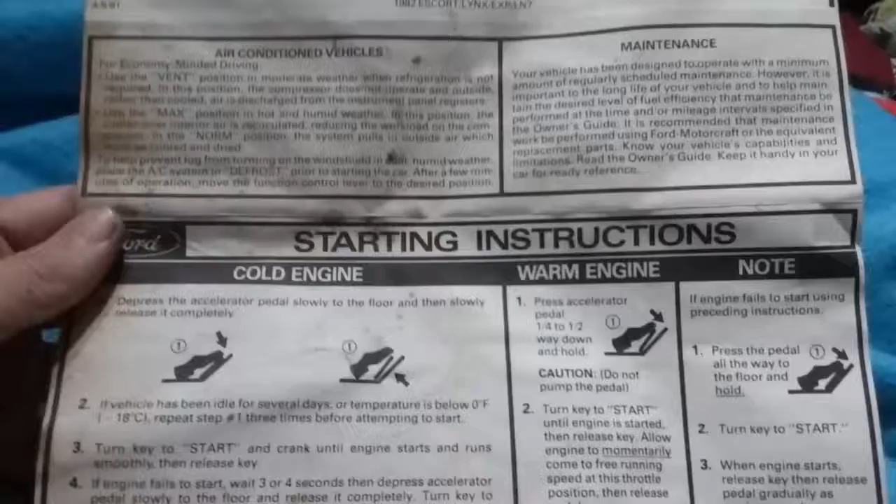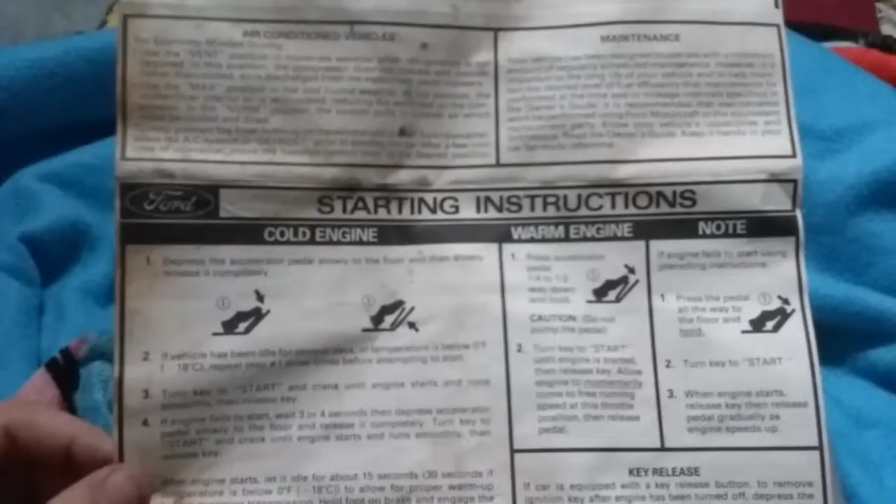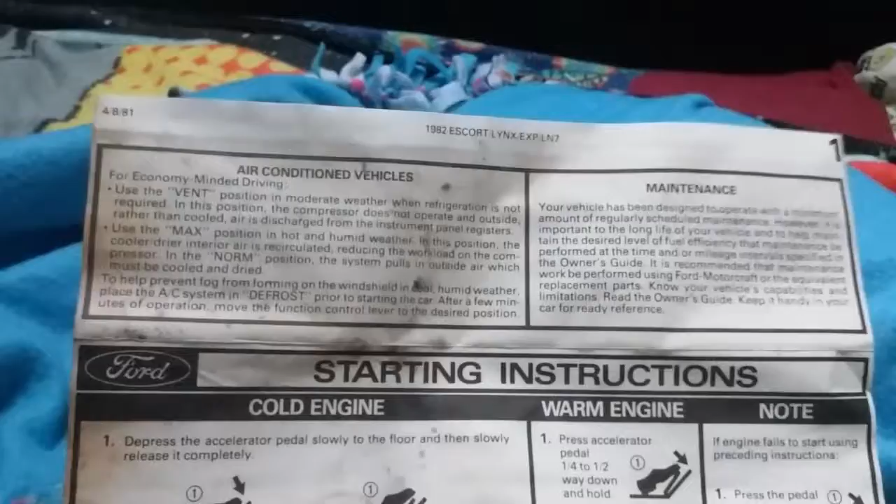Well, hello. This is a piece of paperwork you get with every EXP or LN7 and Escort or Lynx. Or at least you should get this with every one of those cars. But I don't know if it's the same thing they put in all their other cars, meaning Ford and Mercury.

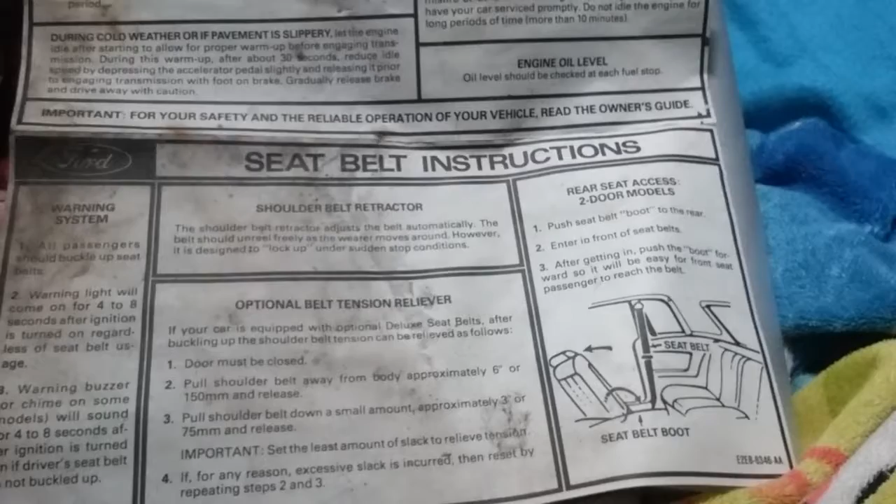Anyhow, it's an interesting giant piece of paper. I can't remember where they put these. They either put them in the glove compartment or wrap them around the seat belts or something. Kind of varies car to car.

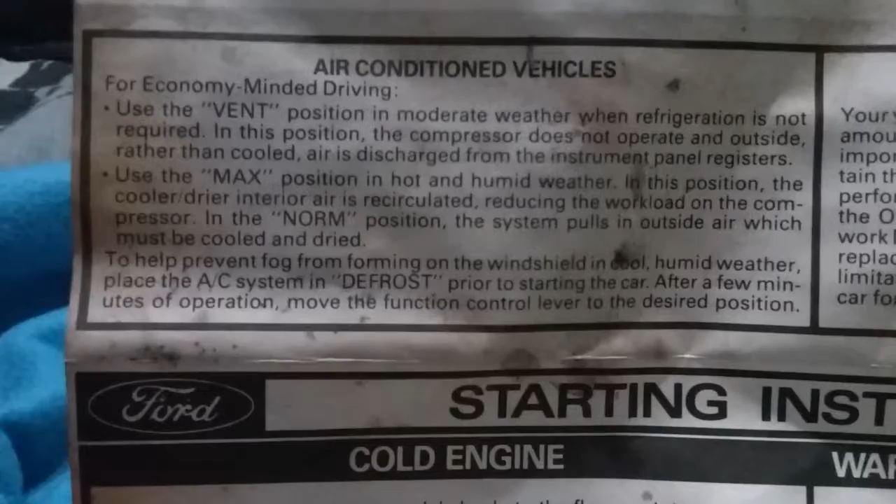Anyways, it gives you instructions for air conditioning controls. So I'll let you read that. Just hit pause and check it out.

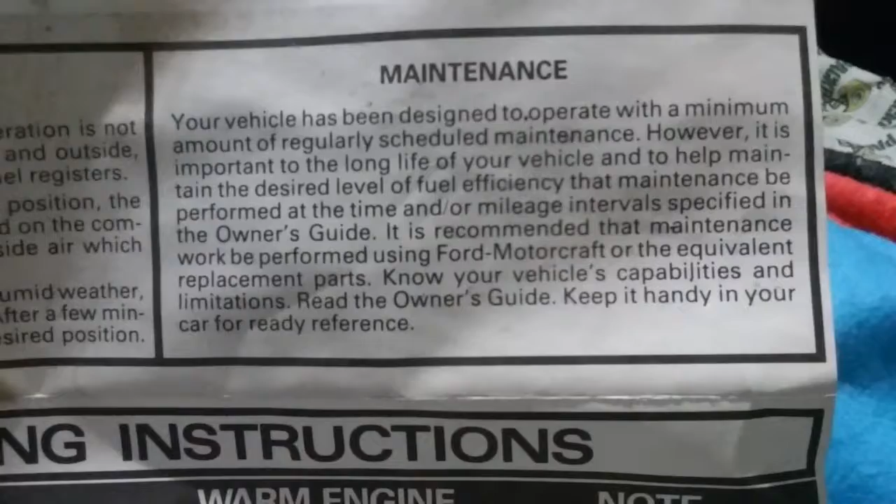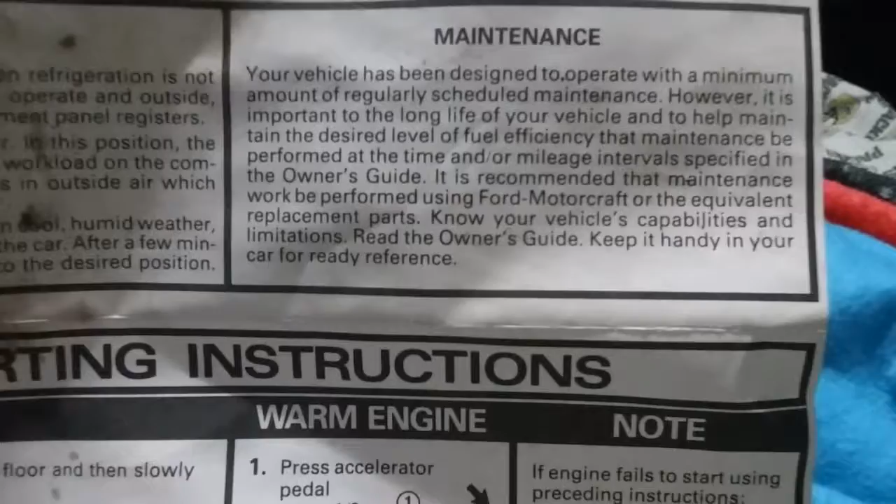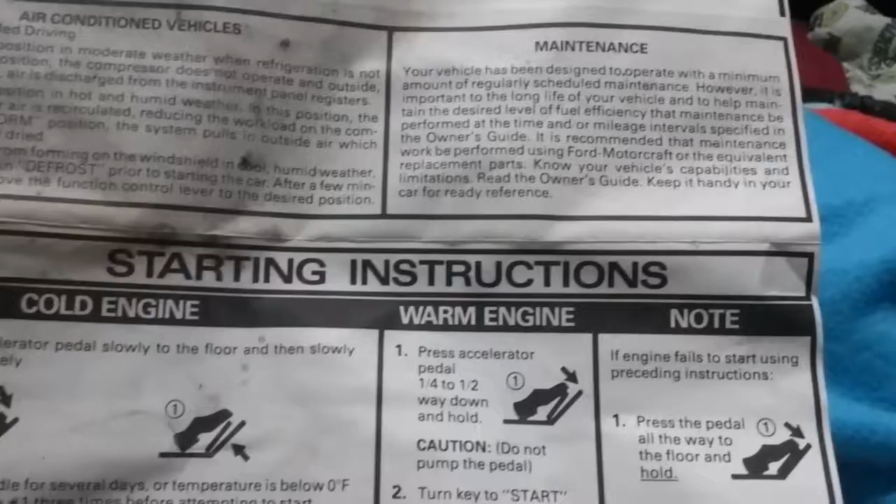It talks about maintenance. Your vehicle has been designed to operate with a minimum amount of maintenance. Even though the maintenance intervals on these cars are quite interesting. The timing belt has to be changed quite frequently, every 40,000 miles or less. But all the liquids supposedly can go on for a long time.

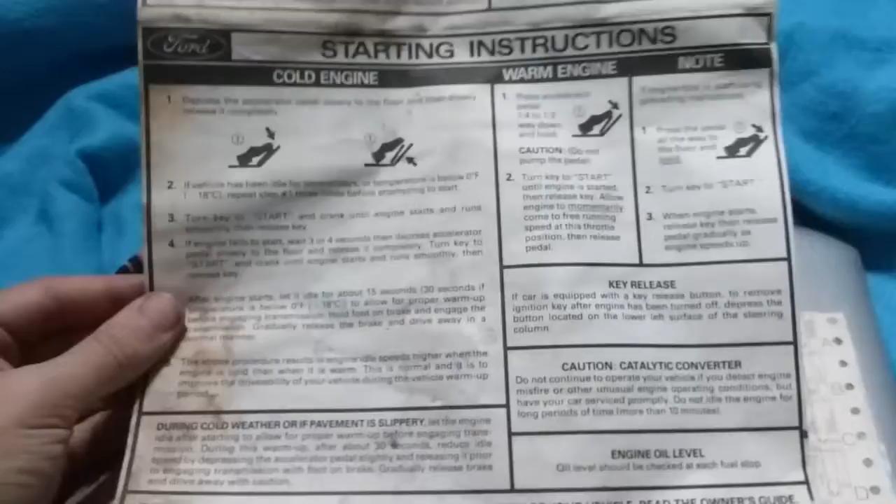But the next part of the paper, you can see it folds here. So this whole top half just folds away. So we'll do that here.

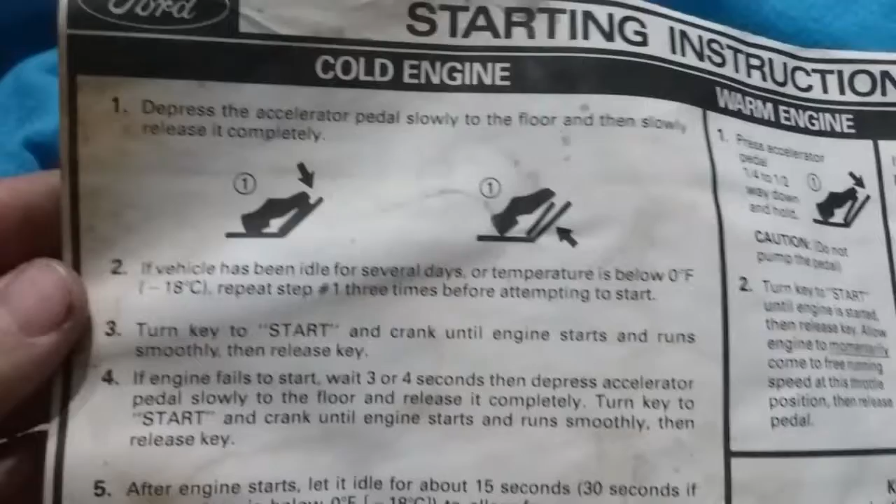Next section is starting instructions. So if your engine is cold, you follow these steps. Kind of common sense, but it is interesting if you don't know this or if you've never heard of it before.

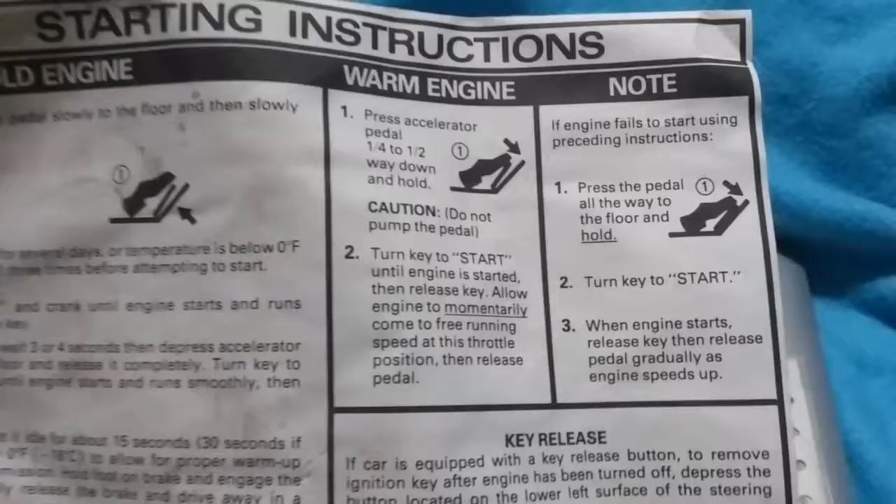Same if your engine is warm, or if you have a hard time getting it to start or whatever. And then it goes into some more detailed stuff.

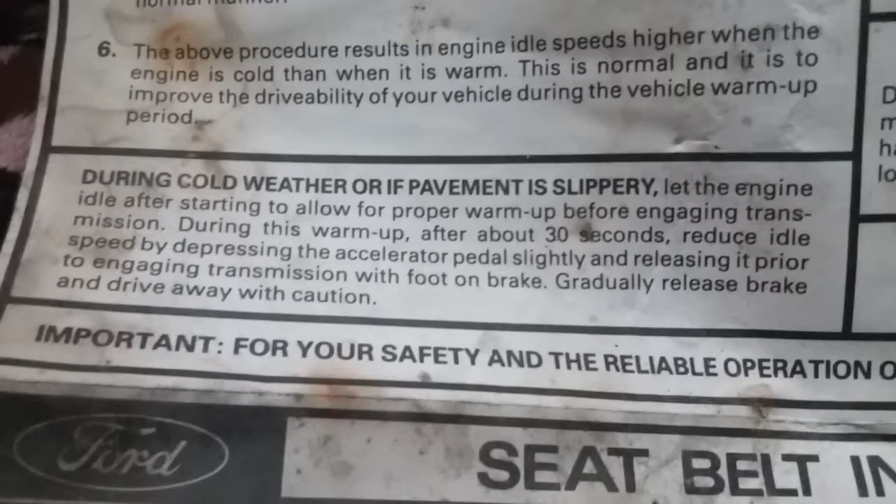That's interesting. It's got safety notes on it. Read the owner's guide - these are interesting. It gives you the directions for key release.

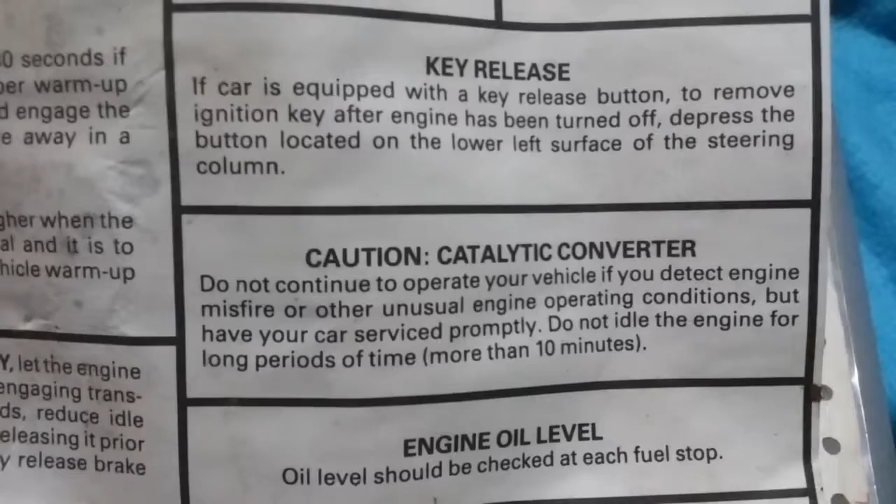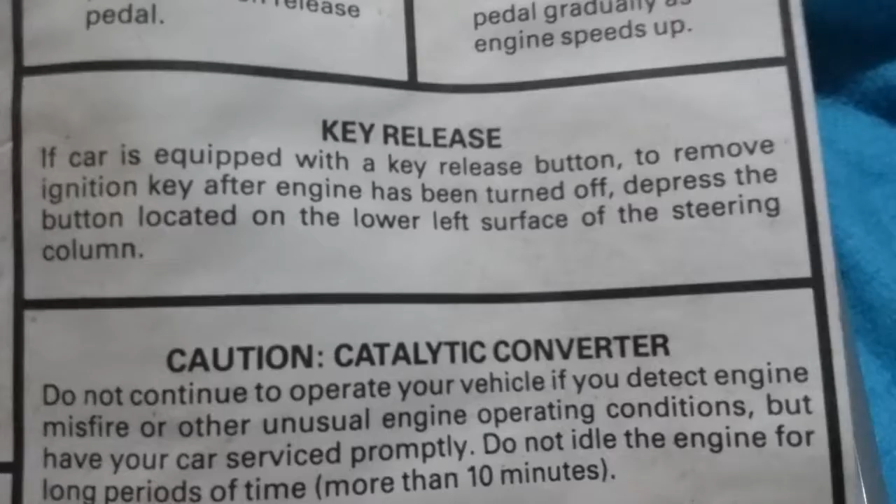Every EXP, Escort, LN7 and Lynx should have this. It's a little round plunger underneath the steering wheel. Like it says, it's just to the left of center underneath the steering wheel. So you just push that while you're turning the key, and pull that knob down and your key will come out.

Do not force your key out. You will wreck something.

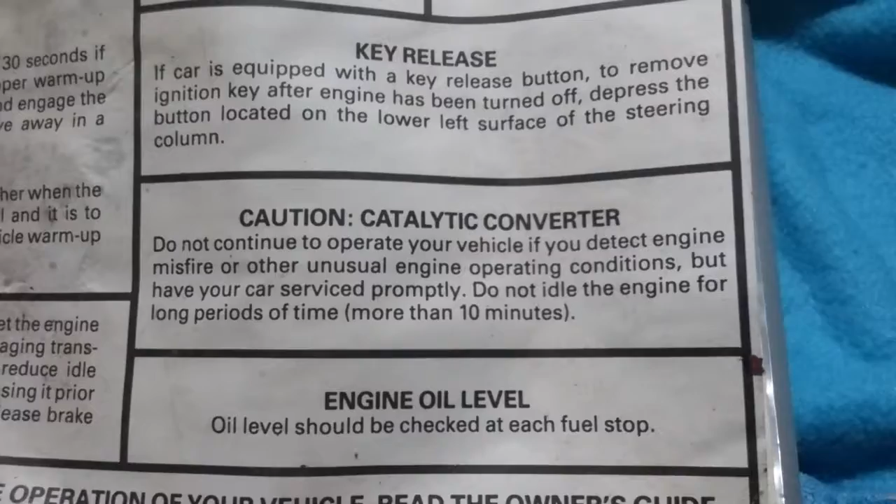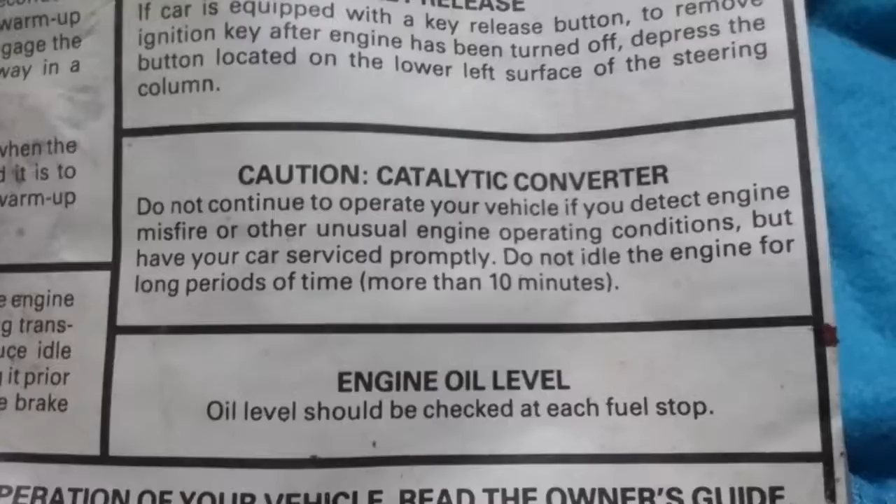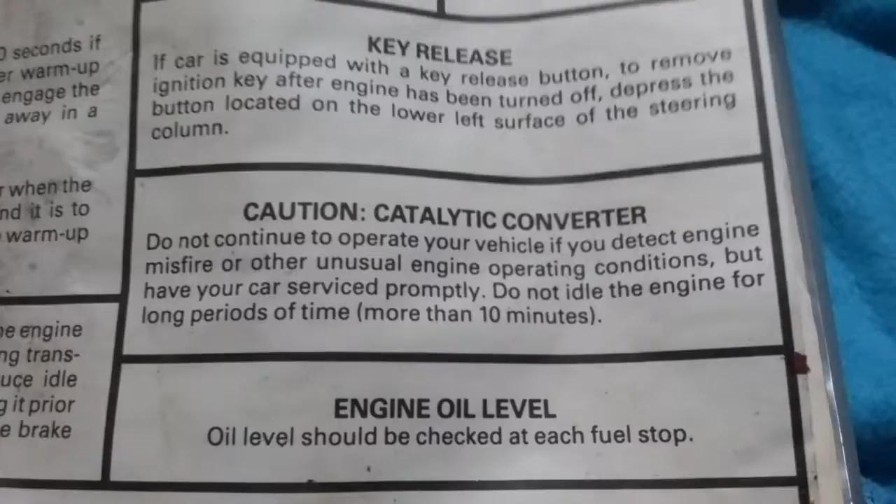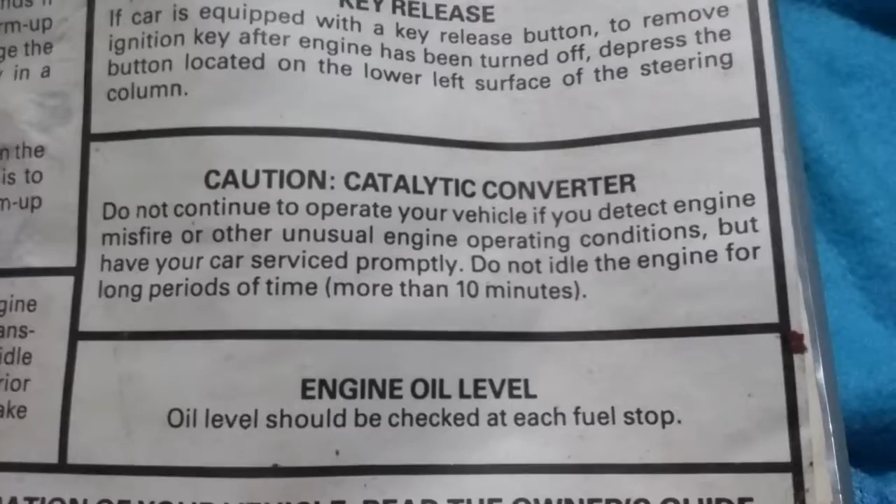Gives you catalytic converter caution. If you have an Escort, EXP, LN7 or Lynx, any car from the 80s pretty much, or pretty much any car built before 2000 probably has a plugged catalytic converter. Up until the early 2000s, catalytic converters would plug up well before the 150,000 mile mark. So if you have a carbureted car, odds are that sucker's plugged. I recommend emptying it, but that's not legal, so heed the warning.

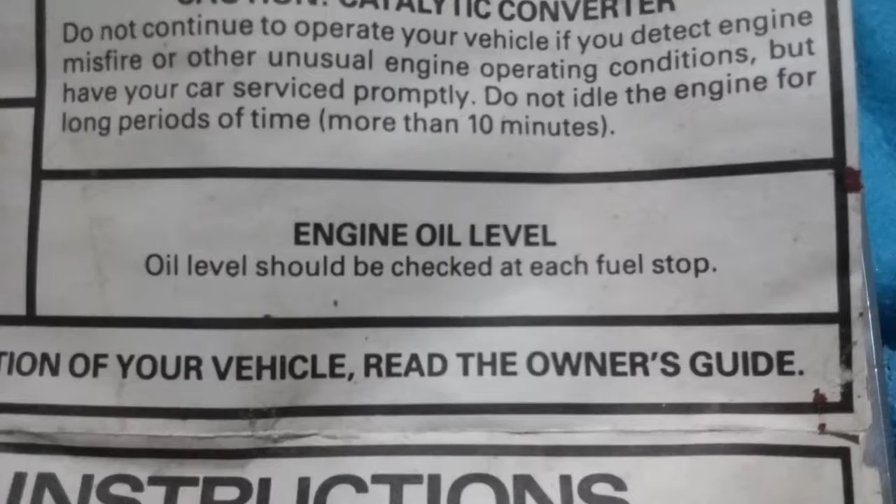Engine oil levels should be checked at each fuel stop. The CVHs don't ever seem to burn any oil. I only just got an EXP with a 1.6 that has some blow by, but that is the only oil issue I have ever come across out of all of the engines I have.

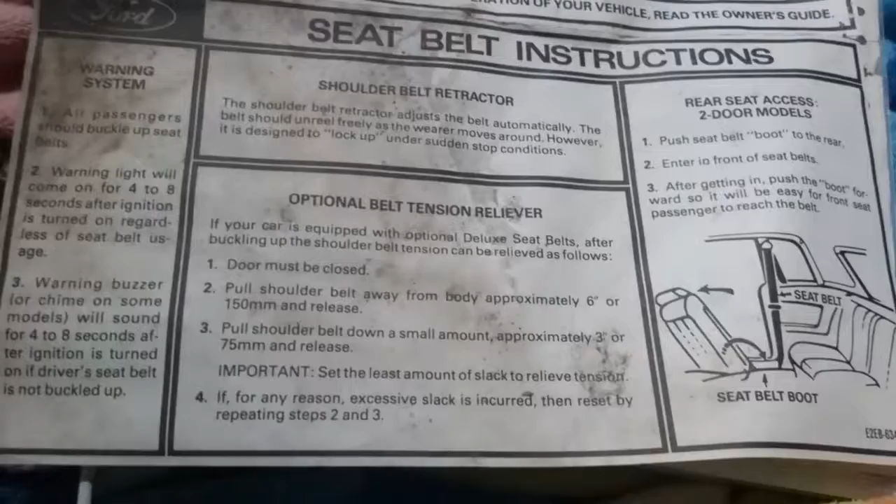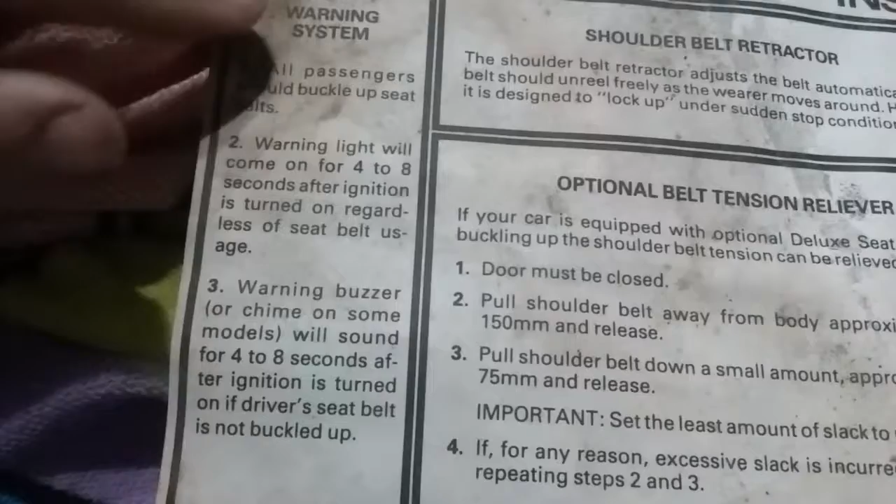And then the final section here is seatbelt instructions. So you get a little thing on all the warning buzzers. The warning light will come on for some amount of time. The warning buzzer comes on whenever you leave the lights on or leave the key in, or have a door open.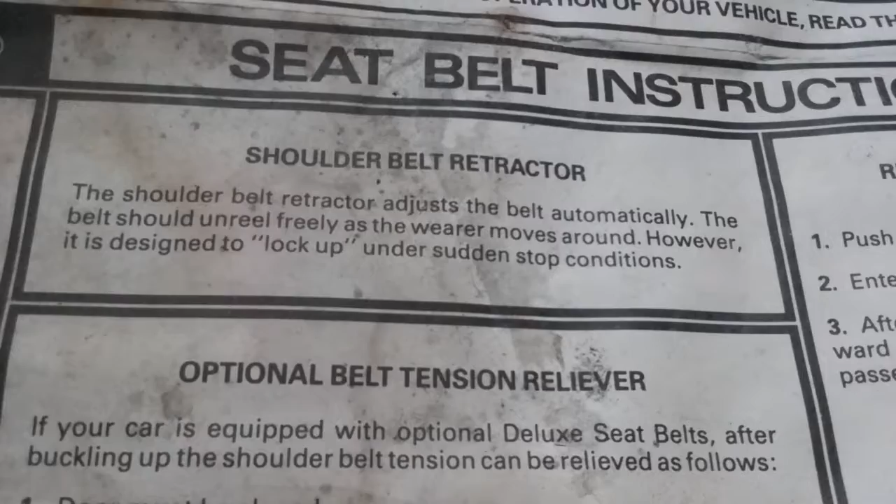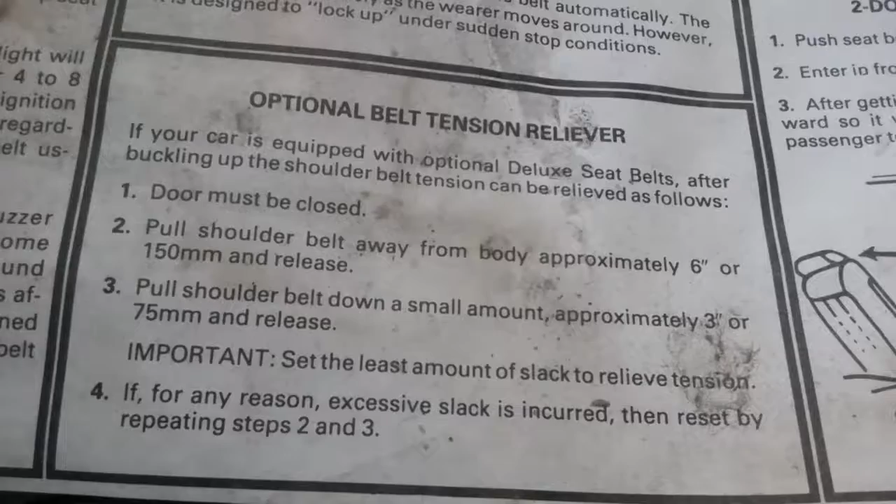That's the seat belt. If you yank it forward really quick, it'll lock up just like any other car, or at least any Ford for that matter.

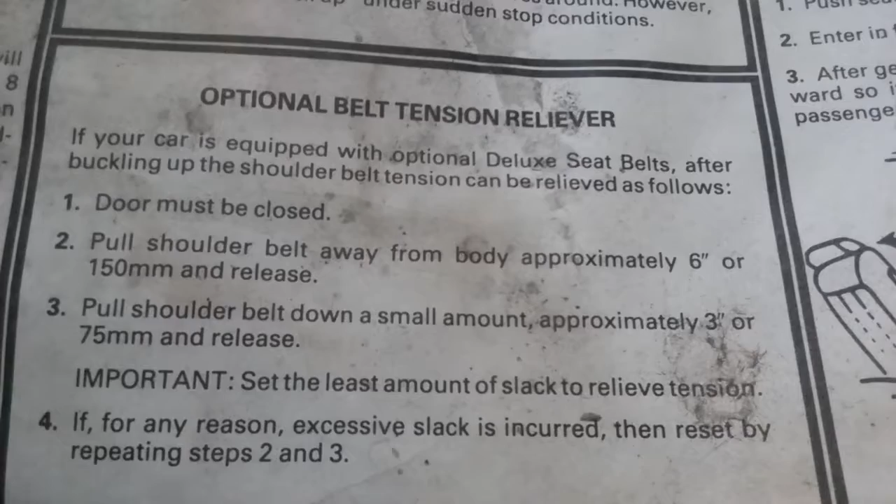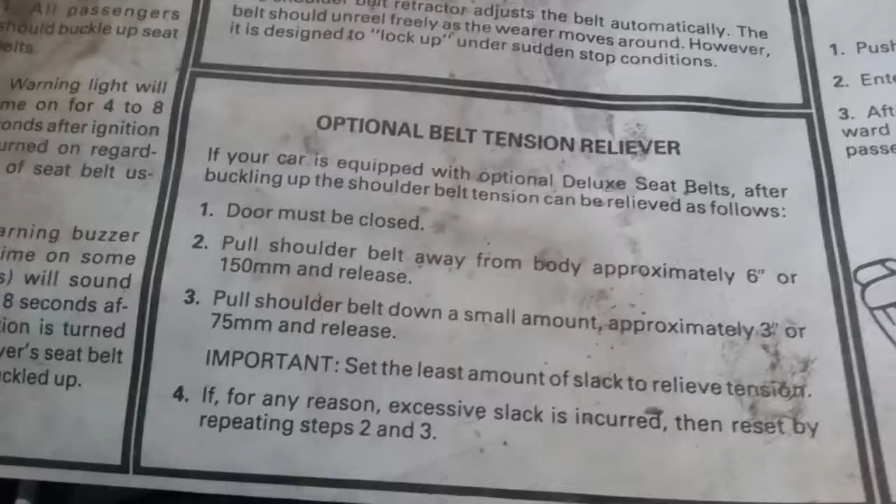Here are the instructions for the optional belt tension reliever. This is something to keep in mind in every EXP and LN7. There is a plunger that goes to the seat belt recoil - I think they call it the recoil. It's the housing that the seat belt rolls back up into. And that plunger connects to the door.

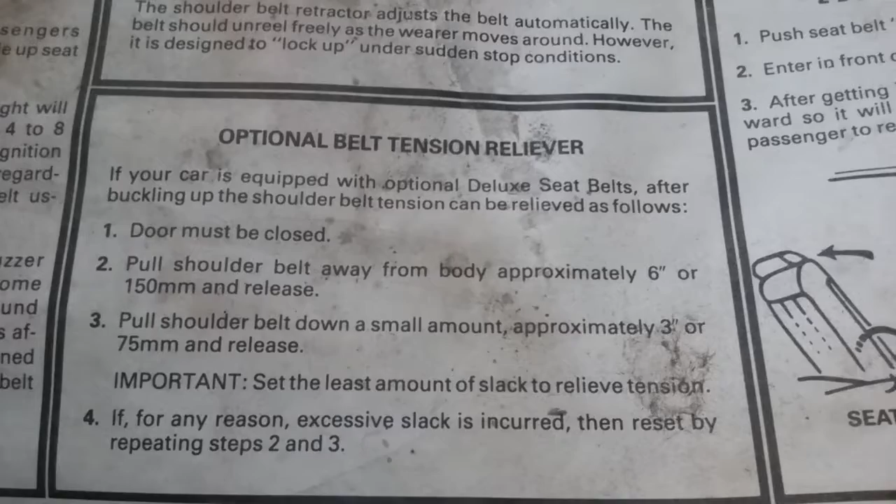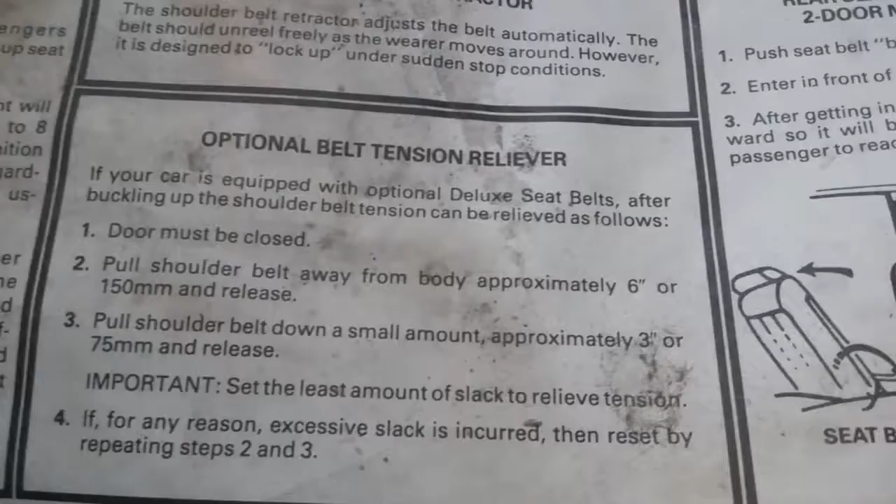So if the door is open, that plunger does something. I presume when the door is open, it keeps the seatbelt locked, and if the door is closed, it keeps the seatbelt unlocked. I'm not sure, maybe I have that flipped around, but there is some sort of seatbelt locking mechanism in the bottom corner of each of the two driver doors.

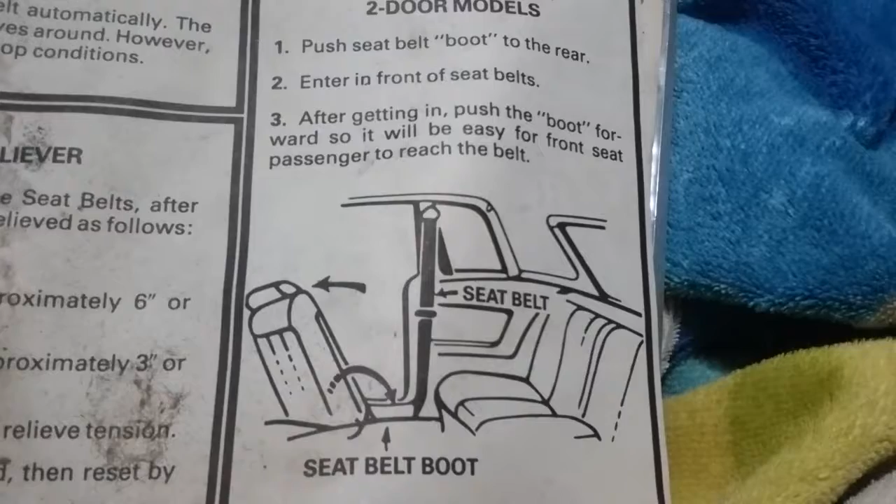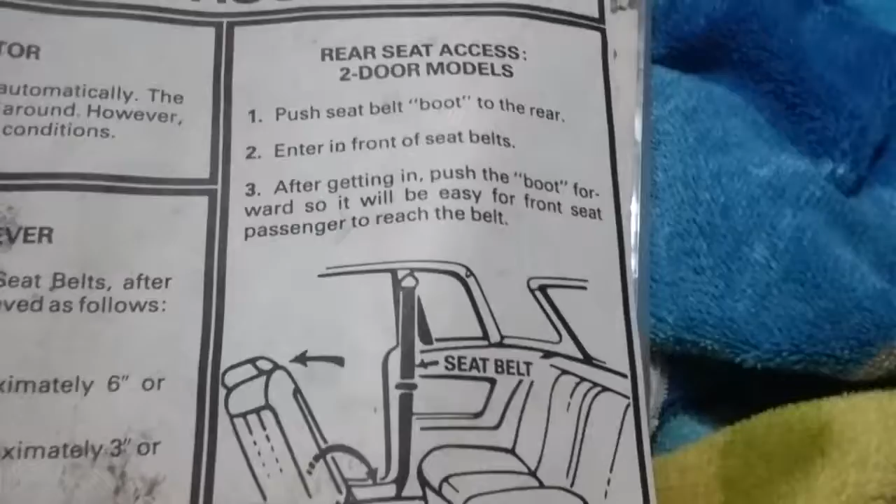And then you have these rear seat access, which is... well, you know, anyone who's ever driven a car should know how these work. But anyways, that's about it.

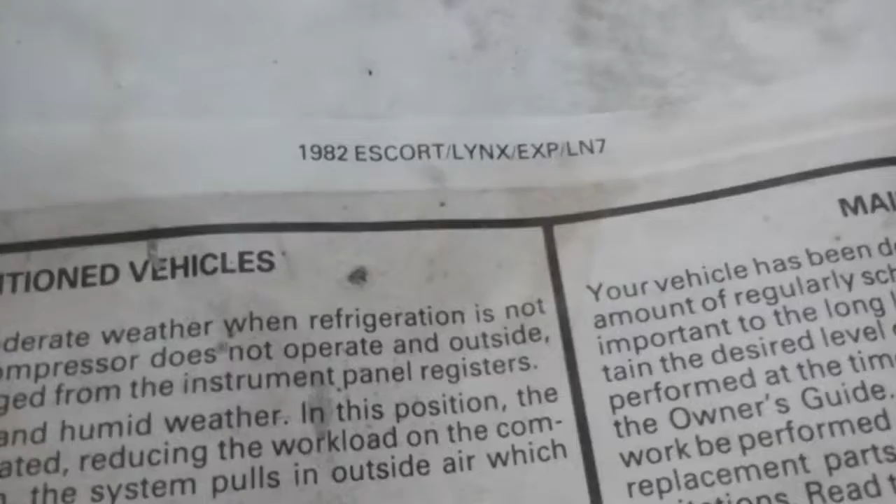I put the date in here. So this was made March 8th, 1981, or 82 model Escort, Lynx, EXPs and all that. So it's fairly interesting, I think this is the first one I've seen.

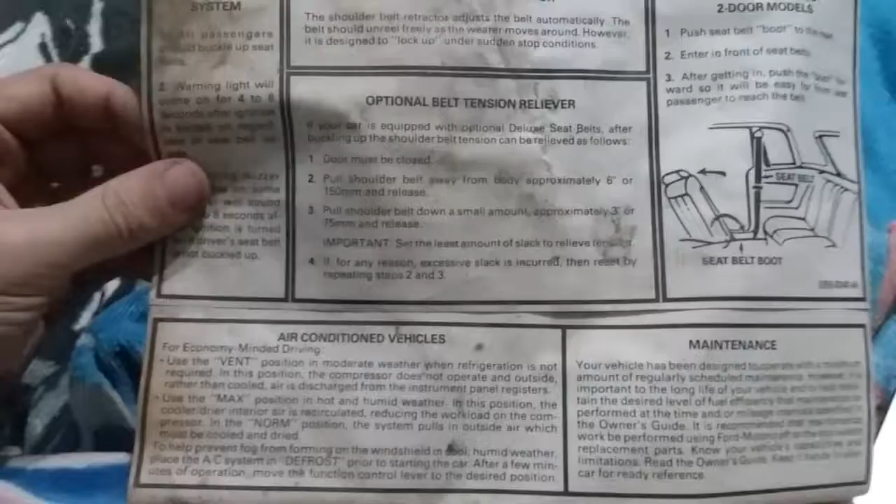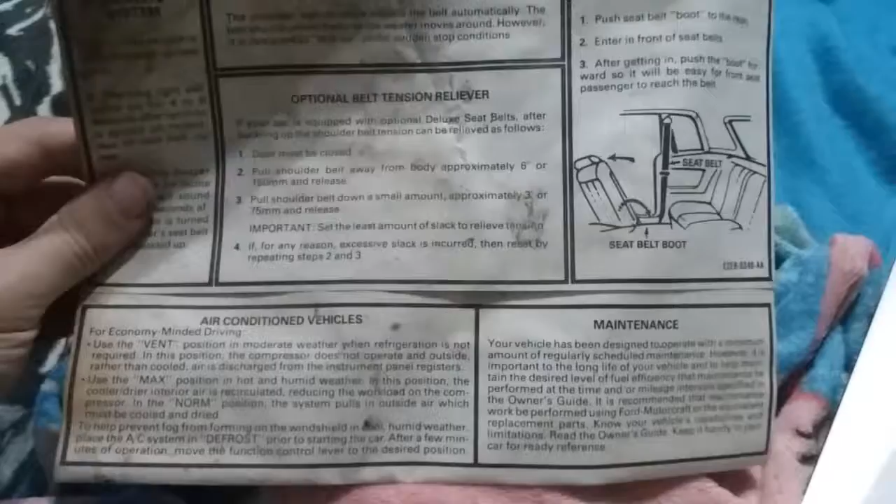I might have one hiding away in with the literature for one of my 82 models, but yeah, just something interesting. Again, I don't know if Ford put these in any of their other cars, but I'm sure they did. Maybe it looks different, not sure. But anyhow, that's about it.